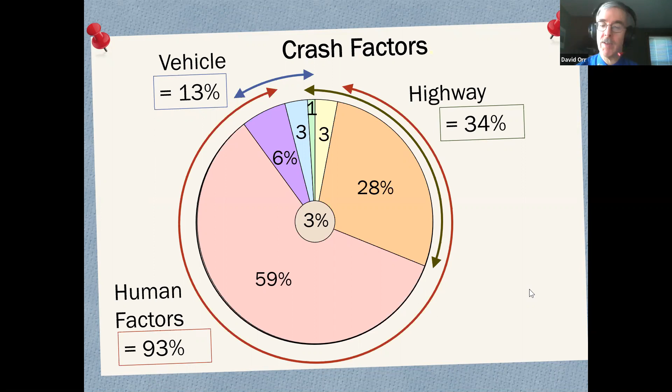Look at the vertical alignment. That starts to get economically, could get a little bit more expensive. That's a good idea, though. Something to at least think about. Again, the idea is to think about what you can do short-term and long-term.

And again, we can spend a whole hour on it, but one of the things that as I go around the state and I see that I really wish people would put a lot more effort on is look at the edges of your roadway.

Now we're going to see if our video shows today. I've got several videos of being brave today and see if the internet's going to be happy with me.

So one thing I'd like you to think about, long before we think about rail, is think about repairing the edges, your drop-offs, especially on the inside of corners, maybe even widen the pavement out because we know vehicles tend to track, or using the safety edge. We've talked about it in a couple of the webinars we've had this spring. So I really wish we could spend a lot of time on that, but today we're going to be talking about rail.

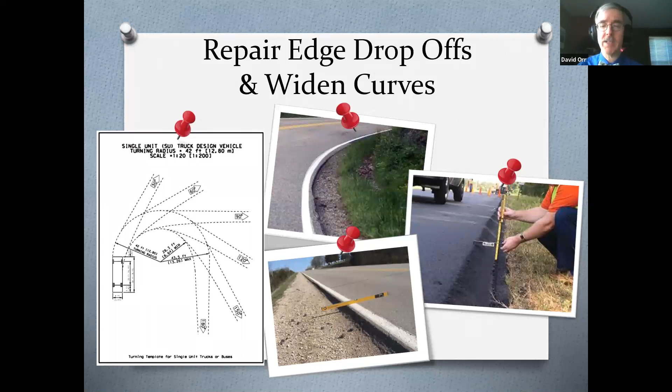But looking back at that particular photograph, without having to do major realignment, with a lot of extra effort, people mentioned the delineators, actually chevrons possibly needed, proper signage to tell the driver what to really do, and actually really important, might need to be widened here on the inside of this corner, to widen the inside of that sharp corner. It's actually in the Green Book, it's in the standards, but we don't do it as often as we probably should. But just look how the back end of vehicles, especially those with trailers, track, and try to accommodate that with your pavement.

But what we're going to do now, though, is we're actually going to talk about the roadside. So what happens when a vehicle does leave the roadway, and how do we keep them safer? Okay, so I'm going to talk about some of the most common roadway hazards, but again, in the Q&A pod, if you would please, put in an example of a roadside hazard that you think is commonly struck by vehicles when they leave the roadway. Put in some answers for me.

A tree, yeah, tree's a good one. Utility poles, signs, blind spots, giant mailbox structures. Yeah, I like that one. Guide rail. Yeah, guide rail in of itself is a hazard, and we're going to be talking about that to some extent, okay? Okay, so those are some good answers. Let's go a few of them, talk about a few of them, and talk about their relative hazards that we come up with a little bit.

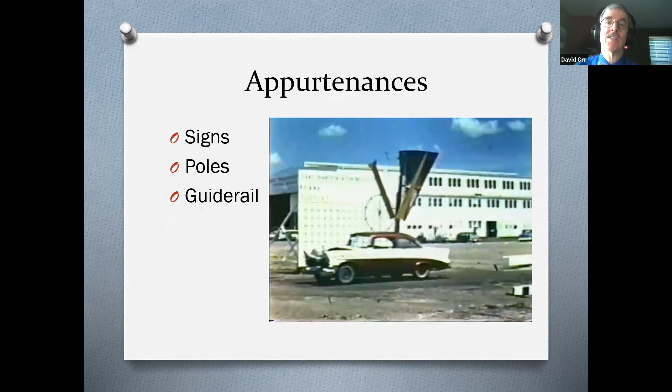We want to have breakaway systems for our signs, possibly even for our poles. And we want to put rail up in such a way that it actually doesn't make things less safe, if at all possible. Okay, so keep that in mind as we go forward. Signs certainly are an issue, okay? And if the signpost isn't breakaway or sticks out of the ground too far, it's going to be an issue. So we need to make sure we don't do that.

Utility poles are certainly an issue. We can't get rid of all the utility poles. They're there for a reason, but we want to think about where we put them. Make sure we put them in a place that is at least less likely to be struck, or if they are struck, maybe they're not struck at such a high speed. And yes, rail is a hazard, especially rail that's got improper ends or isn't anchored properly, can certainly be a major issue. So think about that as we're thinking about whether we're going to put rail up or not.

And when it comes to fixed object crashes, I'm going to give you a list, okay? Trees and shrubs, signs and poles, barriers, or other fixed. In the Q&A, what do you think is the most commonly struck? Trees? Trees. Yeah, I did say earlier, somebody was listening. Turns out almost half of all the single vehicle fatal crashes when you leave the roadway are caused by somebody hitting a piece of vegetation, a tree or a large shrub, okay?

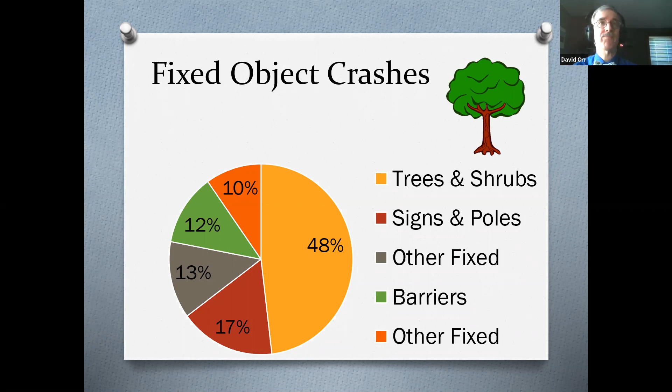But signs and poles, they pop up pretty high, 17% still, so that's pretty important. Other fixed objects, the barriers are a danger, about 12% of the fatals. That's when they hit barrier. And then there's other things like slopes that lead to fixed object crashes that are counted that way, okay? And for those who are wondering, it's just as dangerous in an urban setting hitting a tree. The fatals aren't that much less. People go, well, it's all rural, high speed. Well, about a third of all fatal crashes with trees actually occur in urban areas because trees are pretty unforgiving, okay? So one of the things we want to think about when it comes to trees is having good clear zone and basic recovery width.

Now, I don't like in a slide deck to put too much in the way of text because I know what's going to happen. You're all going to read it, okay? But this is one that's important enough. I want to put it in. This comes from the AASHTO Roadside Design Guide. And if you didn't get the handout, you can download that handout later on. The Roadside Design Guide defines the clear zone as the unobstructed traversable area provided beyond the edge of the through traveled way for the recovery of errant vehicles.

Okay, so that essentially means everything past the shoulder. Some people define it at the edge of the shoulder. In my mind, think about how wide you want to be able to run off that road and not hit something or drop off so steeply that you can't traverse it. Okay, now, does anybody know what they'd like to see for a clear zone on their particular stretch of highway? What would you like to have? 15 feet? I see a 15 feet.

Okay. Well, 15 feet's not uncommon, but has anybody ever heard of a 30-foot clear zone? People talk about a 30-foot clear zone. It's commonly talked about in the literature, and people go, oh yeah, we got to have that. Somebody already knows the answer. They've been reading ahead. Varies depending on traffic count and speed.

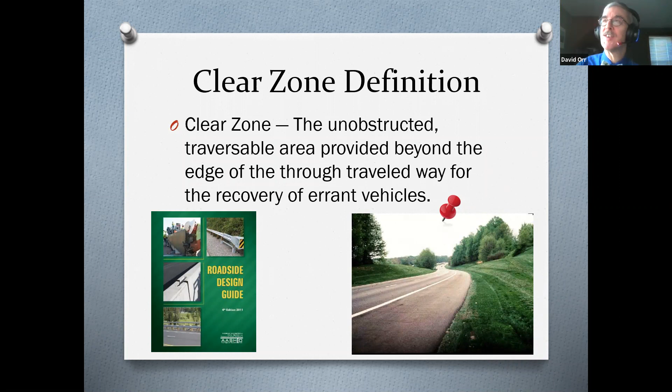clear zone? That sounds really good, except realize, A, people leaving there didn't have to worry about hitting a tree. It's a wide open area. It's a testing track, and they might be driving a little faster than even the people who probably are driving too fast on most of our roads. They're purposely trying to test things. So 30 feet was chosen, but it might have been a little bit too much.

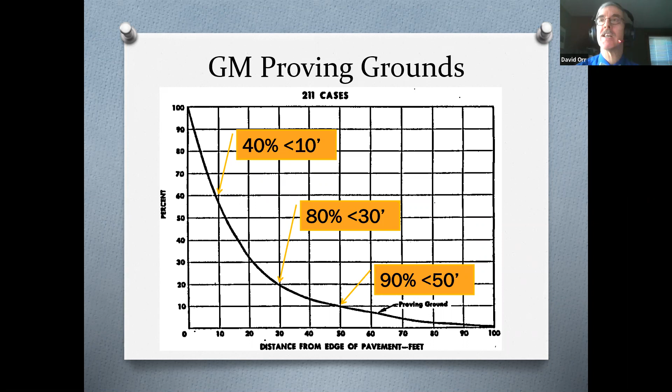Now, on an interstate, can't say that that's necessarily a bad number. Probably is a good number. But we don't necessarily need to have that much clear zone on all of our roadways. And it really does depend on speed, type of roadway, a whole bunch of conditions.

So if you look at all the standards and you start reading through the literature, for urban low-speed roads like in a village, how much distance do you think you need for a clear zone in a village or a small residential part of a city? Do you need 30 feet? Could you even get 30 feet? I mean, I'd have to bulldoze my house. I'm not 30 feet from the road. So what would you like to see for a clear zone in an urban area? 3 feet? Yeah, that's possible. Yeah.

Consistency does actually help. In a rural area where there's higher speed for low volume roads, if you look at the standards again, under 400 vehicles a day, 6 feet is a good typical number that you'll see people use. But that's on straightaways, okay? And obviously, again, more is better. Most local roads, 7 to 10 feet is probably fine. And you want to be consistent about that more than anything else.

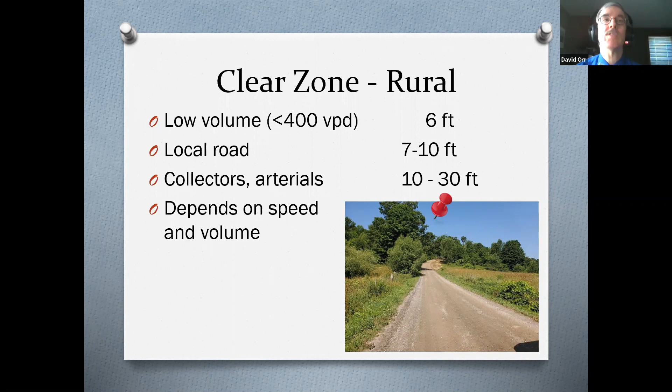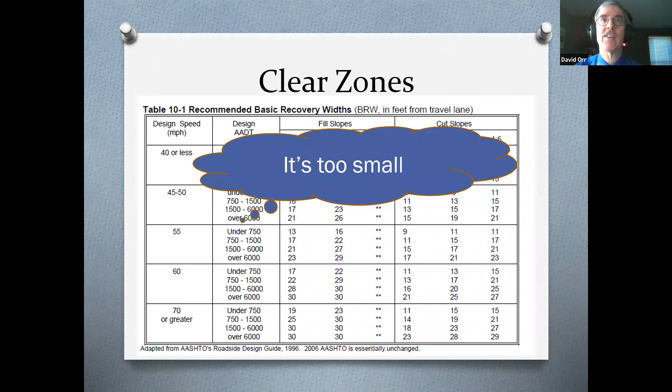And this is the chart from the handout, and I know what you're thinking right now. You're all thinking the same thing. You're going, Dave, it's too small. I can't read it. It's okay. You don't need to read it. You can download the HDM. It's table 10-1 if you need to look it up. We're not going to get into specific numbers too much, but there are a couple that I do want to talk about a little bit.

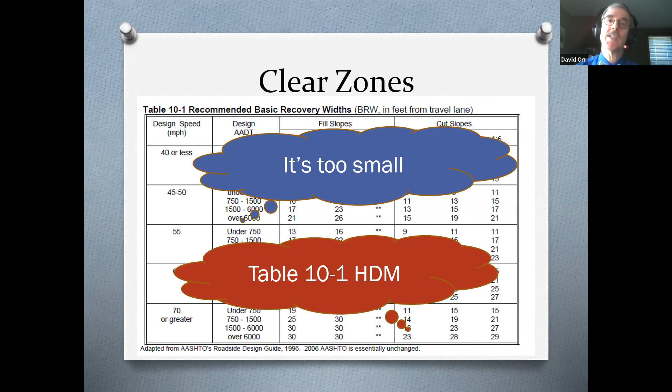And it does matter in terms of your clear zone. It matters your slope, it matters your speed, and it matters the traffic volume and even the type of roadway to some extent. So if you pull out from that table and you look at a high speed, our typical state speed limit of 55 miles an hour, and you look at traffic volumes under 750 vehicles a day, if it's a fairly flat slope, 16 feet is what the state recommends on the collectors and arterial system, okay? They don't recommend even worrying about clear zone slope, though, if it's steeper than 1-on-3 or even 1-on-3. They want you to do something else, like possibly put in some rail.

And on an arterial, that's probably a good thing, but most of us can't get a 1-on-3. But again, it comes down to slope and speed and things like that. Now, in your existing system, I know very few people who are going to be able to get a 22-foot clear zone. It's just not going to happen.

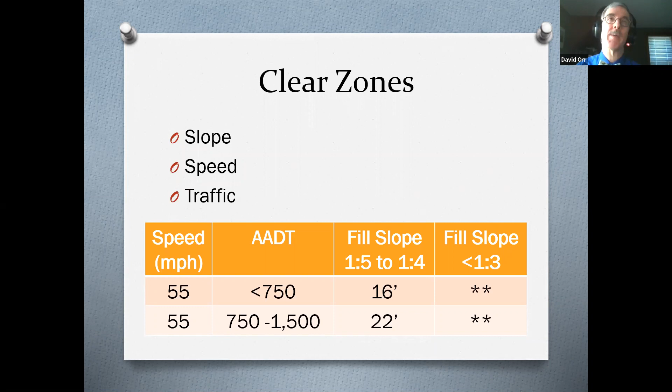So really what you want to think about is for your existing road system, maintain the existing width. Try to improve at problem locations where you know there have been accidents or crashes or concerns. And whenever you do construction, when you do major upgrades, try to improve that clear zone, again, trying to be consistent, okay?

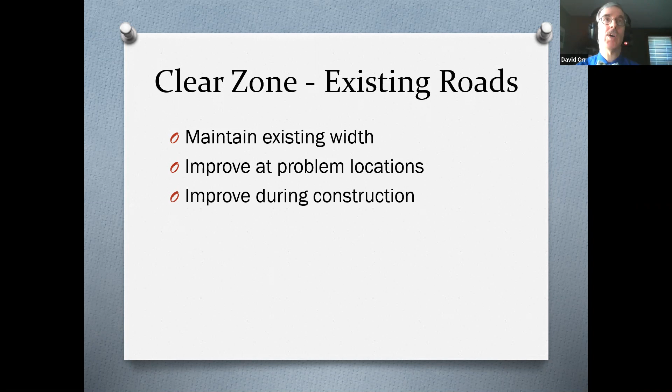One of the worst things we can possibly do is when we cut down trees, we leave the stumps. You really want to cut them flush or remove the stump completely. Grinding it flush is actually fine, but don't leave a stump like that. That's actually one of the most dangerous things you could possibly do, because now you don't even notice it until it's too late.

So first question for the day that we'll have, I'm not doing a poll on this, so it's okay. Just answer the question, what is the proper clear zone on a highway? You should be able to answer that now. What is the proper clear zone on a highway? 6 feet, possibly on the local road, yeah? Depends on the situation, yeah? It depends. It depends on your speed, depends on your slope, depends on your traffic. And you probably should think about setting up policy for this, okay?

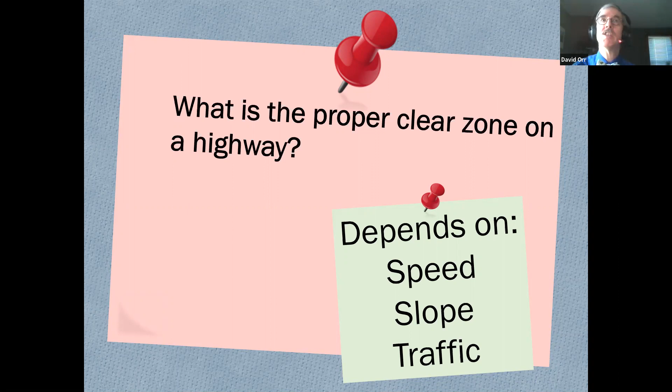Now, one thing, please think about this. Clear zones, we want to be consistent, but think about increasing your clear zone on your curves, okay? The sharper the curve, the more you want to increase that clear zone, because the more chances someone's going to go off and hit something, okay?

So extend it out. There are places on the interstate system where they've got 30-foot of clear zone, and yet it's very deadly because it's on the outside of a corner and people drive straight into the fixed object. So think about making it wider. It also improves, by the way, sunlight on the curve. There's a lot of good reasons to do that, but think about improving, especially on sharp curves.

We want to remove any hazards. We want to make them traversable. We want to relocate them away from the spot where they could get hit. If we have to leave them in the clear zone, we make them crashworthy. Then and only then do we shield them with some kind of rail system. And finally, we delineate. And there are actually times where you would flip the order and you would delineate first. And we'll talk about that a little bit, okay?

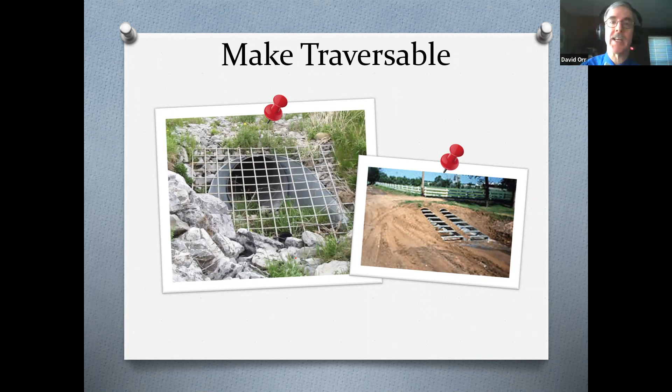And somebody did ask, and I'll go back real quickly. They asked about clogging of the grates. Yeah, these grates that you'll see, these special ends, they're not designed to stop clogging. So you're going to be able to yank them out when an event occurs. Their job is to reduce the need to put rail up, okay?

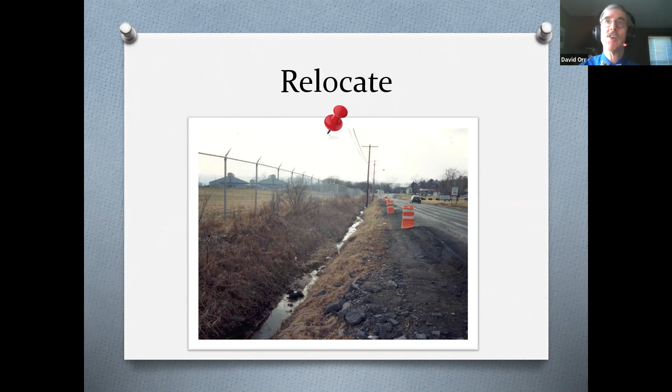One thing we can do, we don't do it probably enough, is to relocate the hazard, move it out of the danger zone, get it further and further away from the roadway. If it's too close, it's more likely to be struck. There's actually data out there, if you're interested. This is actually from the National Cooperative Highway Research Program, or NCHRP. It's 440, it's on the web. It's also in NCHRP 500. But it shows the crash reduction by relocating the hazard.

So if you could move the trees back just 3 feet, you drop the crash rate by about 22%. If you could move it 10 feet, you can cut it by 2/3, which is why it's so valuable to look at getting the trees further back if at all possible. Even removing your mailboxes and your signs can reduce the crashes because they're less likely to get struck. And rail, interestingly enough, you put the rail where it belongs. Put it up when you need it, but put it up properly. You can actually reduce the crash rate. Okay, so moving things back can make a huge difference.

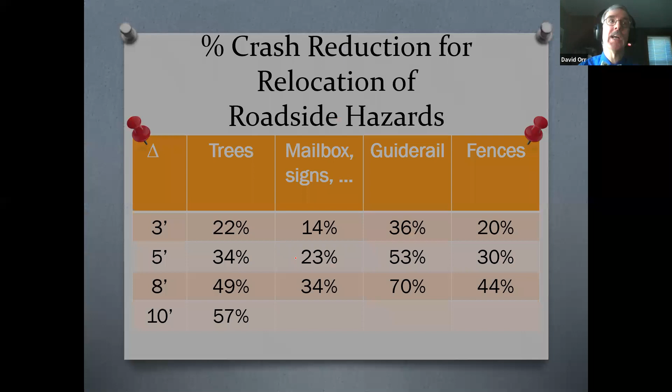And while I'm waiting for an answer there, someone asked, do signs saying no shoulder work? They work in the short term. Signs like no shoulder, you might see them for about 5 or 10 passes, but eventually they stop working. They should only be temporary. A no shoulder sign is really just a warning that something has changed. I wouldn't make that permanent because people will stop seeing it after a while.

Yeah. Yep, everybody's getting it. The utility pole in this case is right in the bottom line of the ditch.

You don't want to put something in what is known as the traversable way of the ditch, because that's where the vehicle, if it goes off this road, is going to wind up going. And if it's got any speed, it's going to stay in that ditch line. And by putting the utility pole in the ditch line, you've actually made it almost more hazardous than if it were up closer to the roadway.

So when you think about where utility poles are, try to avoid any place where a vehicle could be going down that ditch because it goes off the roadway for whatever reason, okay? So in this case, I'd actually want it further over to the Kritz Farm sign there.

You can make things crash worthy. Mailboxes, you know, we put them in our road system, but we can make them more crash worthy. They're not the big brick things that are out there, okay? And there are designs that are designed to flop over the top of the vehicle, get crushed straight down, but you can make them crash worthy. And that's not just the case of our mailboxes. Our signs as well, we can do the same thing, okay?

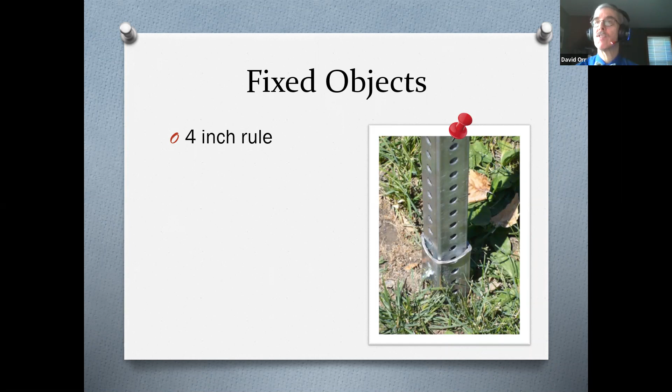But do me a favor, if you're going to put in signs, especially in the clear zone, make sure they either break away or the parts that aren't breakaway are down below the 4 inches. Okay, like a number 3 post, that's considered crash worthy. But anything heavier than that, you need to have a ground post and a proper connector. In this particular case, that connector connecting those 2 channels cost 25 cents. It's pretty cheap insurance.

So now we're going to talk about shielding. Well, actually, we're going to talk about shielding a little bit more in a minute. But notice I'm all the way down the list to almost the end, and now I'm talking about shielding. Shielding is one of the last things we do because, as we talked earlier, about 12% of fatal crashes involve hitting rail. So we can put shielding up, put up our rail, but we want to do it properly, okay? And then lastly, we delineate.

In fact, if you're not sure in the short term, delineate. Put some delineation up, watch it for a while until you can come back in and do something else. Relocate, put up your rail. I always like to start with some kind of delineation. It's not a bad idea. In fact, there was actually some pretty good evidence out there that on really low volume roads, under 400 vehicles a day, it's actually probably more economical and actually less likely to actually cause some severe crashes to sometimes delineate first and put up shielding or rail last.

Now, it depends what you're trying to protect. In this particular case, this is a pretty steep slope. So maybe this is a case whereby you could think about putting up rail. But on the other hand, I happen to know in this particular case, the traffic volume is under 20 vehicles a day. So as a minimum, let's put up some delineation. Okay, delineate the edge of this. Just some simple delineators. You can lollipop them or not, that's up to you. Okay,

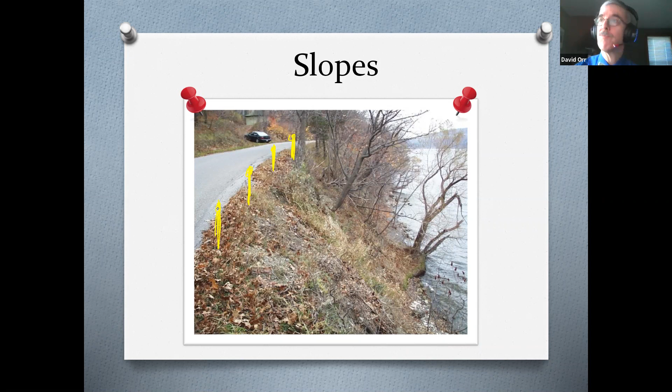so start with that. So in the Q&A pod, let's see how we do. What are the steps for dealing with roadside hazards? There's 6 of them. See if anybody can get all 6 of them here.

I know I'm making you type early in the morning without too much coffee.

Identify your problem. That's probably a good point. That's the first thing, is to identify what are your issues. Yeah, that's actually a pretty good point. Remove, make traversable, relocate, make crashworthy, shield, and delineate. Very good. And by the way, it's in the handout. You don't have to remember it, but I just want you to think about the fact that rail is valuable, but it's really towards the end after you've looked at everything else.

But when we talk about guide rail, we want to make sure we have the right type of guide rail. There's lots of different types. We have to worry about the deflection of the rail system. That's actually very important. There's something called the point of need. We'll talk a little bit about that. The runout length, especially if you've got bodies of water or things you don't want someone driving into behind the rail system. And then the end sections themselves.

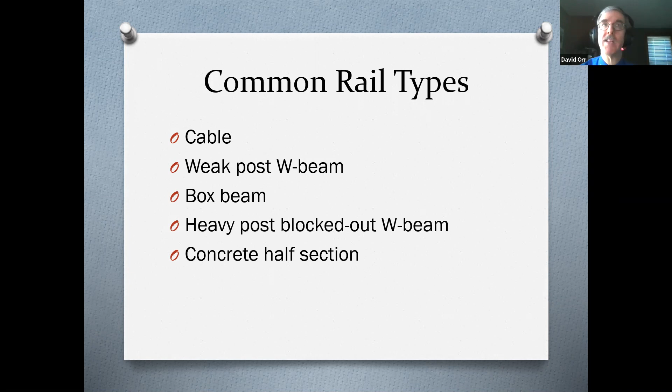I like cable rail. Cable rail's aesthetically pretty pleasing. It doesn't interfere much with your viewscape, but you've got to maintain it. There's a turnbuckle system. It's got to have the proper tension. You need all three cables to have about the same amount of tension in them, or they're not really going to do the job as well as you'd like. But cable's a common system and can actually be used against slopes if it's got the right connections to the post.

You can use weak W-beams. I like that. Again, it's a fairly light system, but it's got to have enough length to build up that tension to act like that big rubber band. Otherwise, it's not really doing the job we want it to do. And it's got to have enough deflection. And we'll come back to that in a little bit.

There's box beam. Again, we use a lot of box beam here in New York State. Box beam is nice. It actually transitions into bridge rail pretty easily. People like it. Relatively easy to maintain. But again, it's a little stiffer than the W rail system. You can block things out with plastic or wooden blocks and heavy post beams.

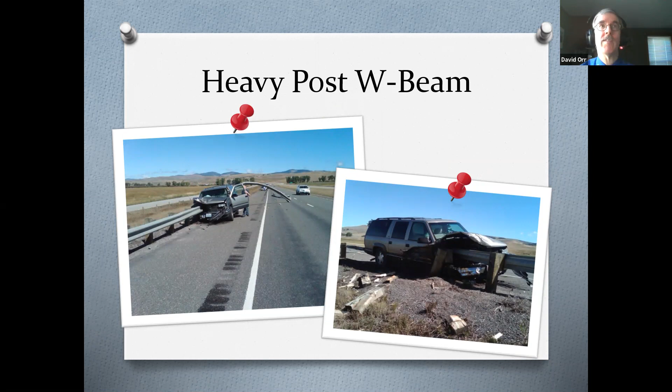Now, this particular picture shows the aftermath of someone actually going through the end of the rail system. You've got to have good end sections, whatever rail system you've got. Now, the next thing I'm going to show you is a video of a newer system called MGS. It's a Midwest Guardrail System tested to the most current AASHTO standards. We can get you the details for this, but I just want you to see what happens when a truck hits.

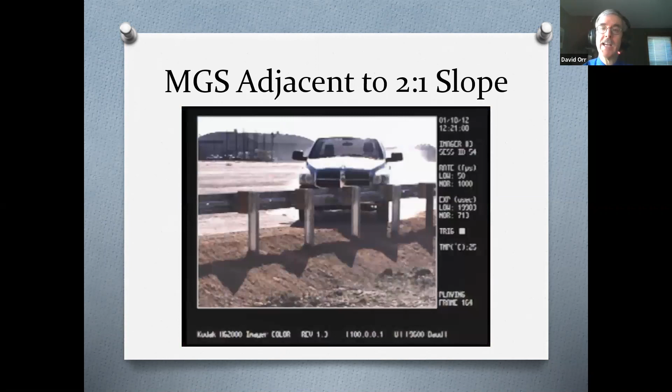And you can see it actually worked pretty darn well. The blockout system, it hits it pretty hard. Watch it coming in slowly. The whole point of the blockouts is to give it a little bit of space so it doesn't snag on the post. And it does a pretty good job.

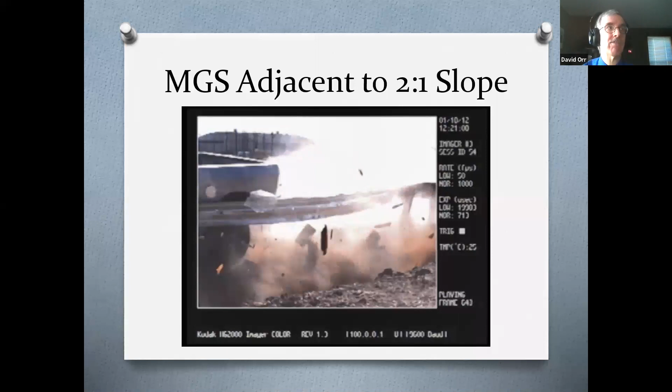It does snag right there. You can see a little bit of snagging. But for the most part, that vehicle is almost in midair and is being pulled back by that rubber band effect. And it hit it at a pretty sharp angle. But again, the rail did its job.

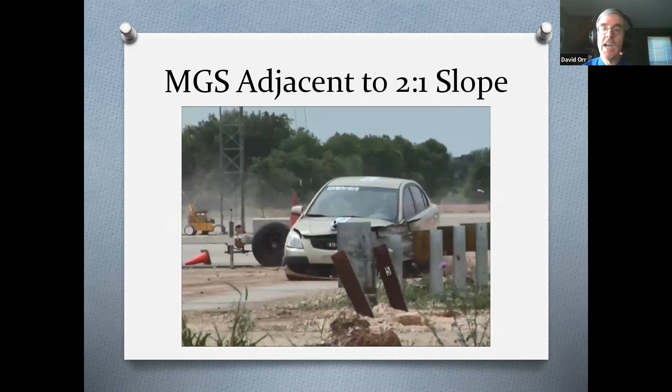And watch what happens when a smaller car hits it. Yeah, a little more damage to the car, but the driver could walk away from that. And that's really the goal in this particular case. Watch high speed. The damage was because it did a little bit of snagging. But again, it did an amazing job of protecting.

The key is use the lightest rail system you can possibly use. You can use it up against slopes, but if you do that, make sure you've got good soil support, because that post system has to have that support to hold it in the right elevation, but also to help continue that tension along the system. Otherwise, it doesn't deflect properly.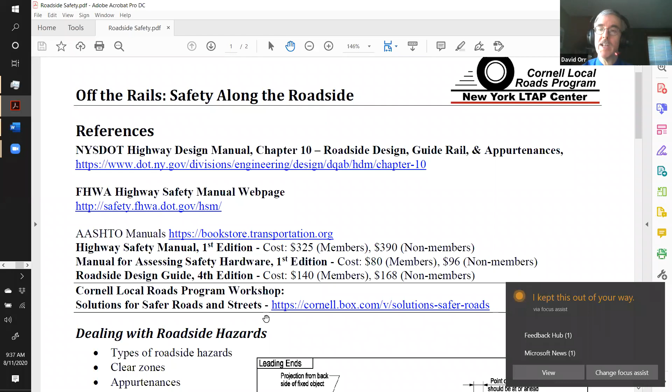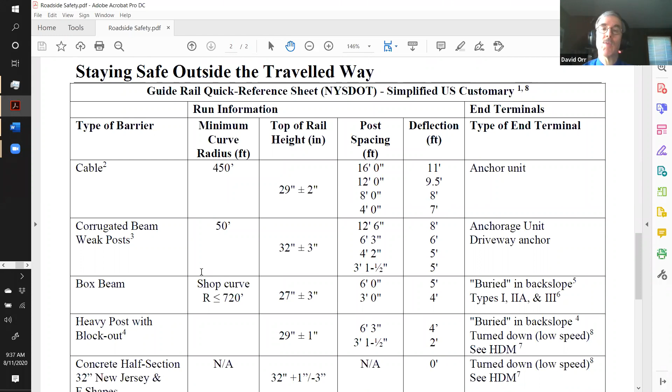So I'm going to scroll down here. And in the handout, you'll actually see a table. This is pulled from New York State's quick reference sheet. It shows for the different types of barrier what the deflections are. So you can see, depending on how stiff it is, how much deflection it's going to need behind the system. Now, why is that important?

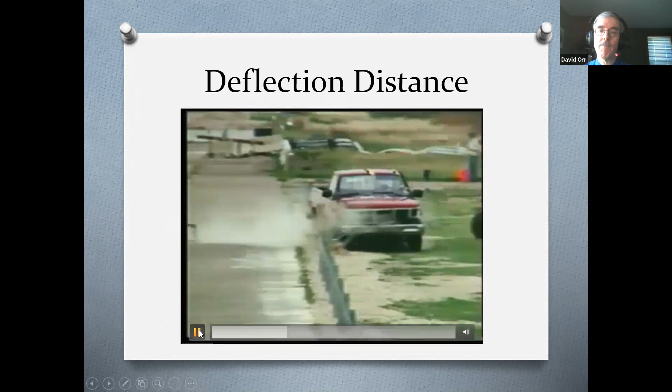Well, let's go back over here to our slide deck and watch again the same video we saw before. Watch how much distance that vehicle goes down the roadway. I'm going to do this one more time. I'm going to stop it. That truck has deflected all the way out, more than the width of that particular truck. If there is an object within that deflection distance and it hits the rail, it's actually going to be directed into that particular object.

So in this particular case, this W rail that's up, if someone actually hits that rail system upstream of this tree, they're actually going to be directed into the tree. They have no choice. So you never want anything inside that deflection distance that's a fixed object. So you need to remove any trees, you need to remove heavy shrubs. Don't let utility poles be inside that deflection distance.

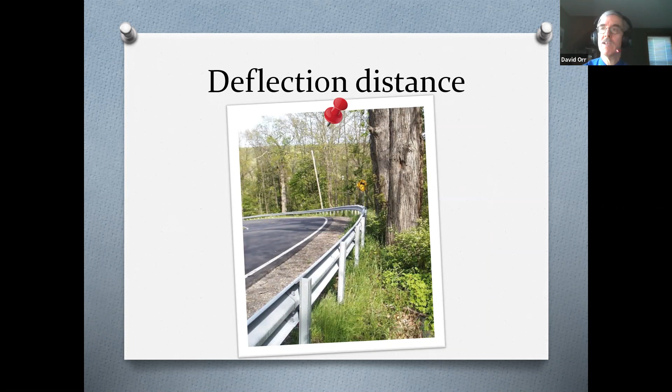So the question then comes, which rail systems have a deflection of less than 5 feet? So I'm going to go back over to the chart and let's go look at the sheet. Which ones have a deflection of less than 5 feet? You can put it in the Q&A pod while I find the ones on here. Let me see if I can get my pen to work here. Here we go, comments.

And I'm going to highlight less than 5 feet. No cable systems have it. 5 or equal, the corrugated with a tight post spacing here. Oh, you're not working for me right now. Box beam, 3-foot spacing. Box, heavy with a blockout. Yep. Jersey barrier. There are different systems out there. Again, you can look them up in the table.

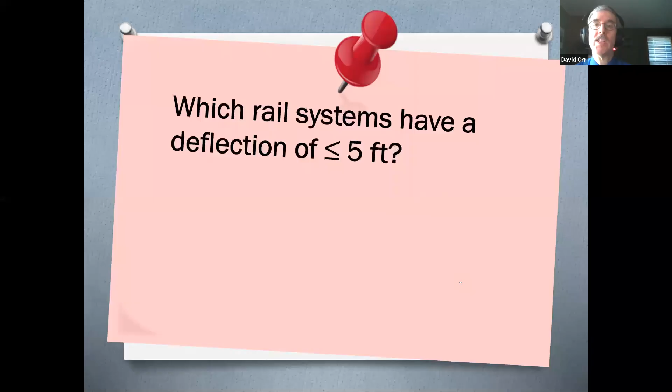So if we looked at that, systems with less than 5 feet, there's really weak post, very tight spacing. Box beam, heavy post with blockouts, and then concrete. You're getting some pretty hefty systems when you start doing that, and you've got to look at your post spacing. That does make a big difference because, for instance, if we look at the corrugated system with weak post, you put a standard 12-foot 6-inch spacing, you're going to have way too much deflection. Okay.

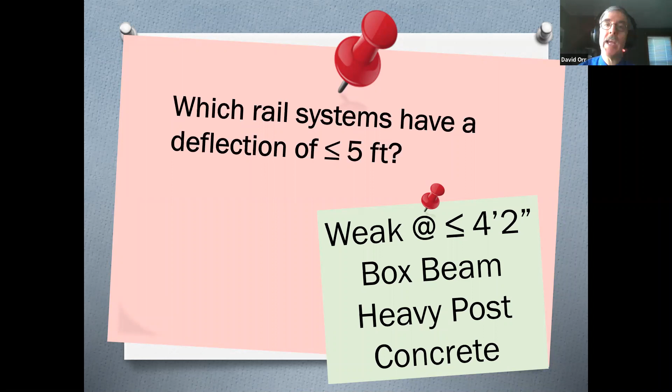Now, in the charts, in the books, you're going to come across some tables. One of them is called a deflection reduction factor chart, which allows you to reduce the amount of needed deflection. Okay. If we look at, say, for instance, 55 miles an hour, and your lateral offset essentially is how much distance can that vehicle be away from the face of the rail before it swings over and hits it, i.e., how much distance from the other lane over to the rail system.

And some people could argue, well, on a fairly narrow town or county road, I could get down in here, let me get a pen color we can read here. There we go. I could get down to here and reduce the deflection, you know, down to 80% or something like that if it's a fairly narrow roadway. 80% of 5 feet is still only 4. Most of the time on high-speed roadways, I wouldn't even bother. It's not worth the risk.

Only when you start getting into urban areas where it's really low speed do I think you can gain some from taking advantage of these deflection reduction factors. It's much easier. Just keep things out of the space behind it. Because again, that's designed for a car. What happens if a big truck hits it? It's going to deflect more. So give yourself room for the deflection.

Okay. And a note here in the pod that says I've seen some awful motorcycle accidents on cable systems. Are all systems equally bad for motorcycles? Actually, a properly set up cable system where all 3 strands are about the same tension isn't actually that bad on the motorcycle. The problem is if there's any slight variations, it can do some real damage. And by the way, it can flip a car. So the idea being, be very careful with maintenance with any system.

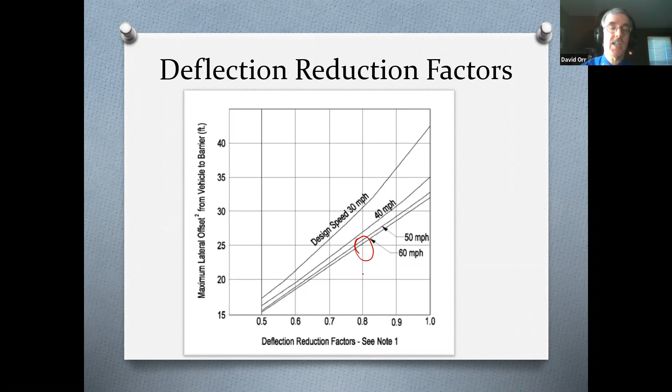And what is the maximum lateral offset? I'll tell you what, I'm going to go over to my point of need picture. We'll talk about point of need here. That essentially, if you imagine you've got a roadway here and I've got a vehicle in the far lane, way over here, and he's going the other direction, is the distance he would traverse from here all the way over to that point. So if you had a roadway that was 30 feet wide, including your shoulders, the lateral offset would be in the 24 foot range, depending on the width of the vehicle. That's where that comes from.

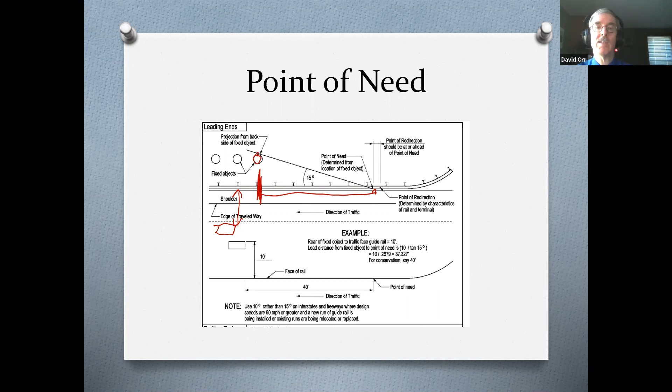But let's talk about that point of need. Most rail systems I see are too short, okay? And so they just don't have enough distance. If you've got a fixed object behind your rail system, you can't start your rail right here where the first fixed object is. You have to come back so that if a vehicle hits the rail system or doesn't hit the rail system because it hasn't started yet, it doesn't wind up hitting the fixed object. See, it's called the point of need. Now, again, don't try to read this. It's too small, okay? It's in your handout. You can look at it later on.

But an easier way to think about this is there's a formula, okay? It's the distance that you need to have from the front of the rail to the back of the object, R, times the cotangent of 15 degrees. Does anybody know what the cotangent of 15 degrees is? It's a hard number to remember. Just remember 4 times R. So essentially 4 times the distance from the front of the rail to the back of the object.

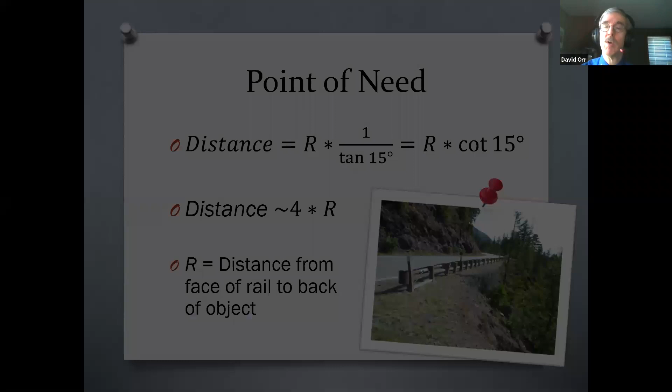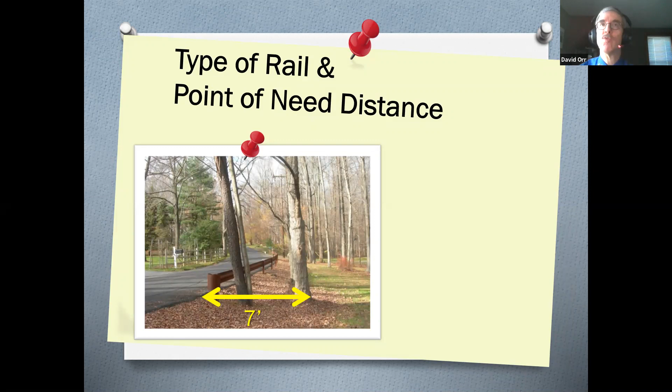So if we go back to our picture we had of our W rail that we know was too short, and we measure from the front of the rail system all the way to the back of the object, and if it's 7 feet, how much distance do I need to be down the road when I start my rail system? Okay, 28 feet, exactly. 4 times 7. Now, if you do the actual math, it turns out to be 26.2.

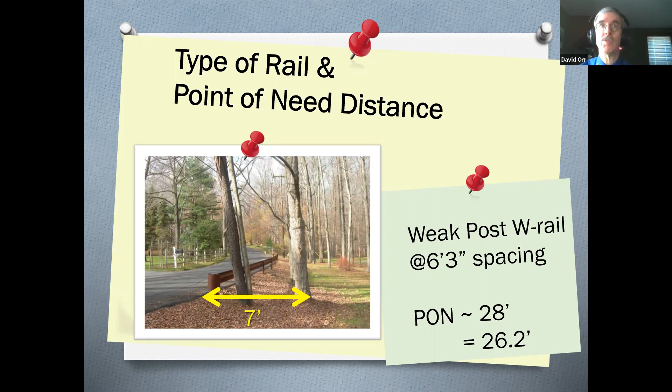28, okay? 28 feet to the beginning of the full rail system, but then you're going to need to add an end section on the end of that. That's to the beginning of the full rail system and into your end section. We'll talk about end sections here in a few minutes. The other item is something called the run out length, okay? Now, in this particular case, you're not worried about someone getting in and hitting a fixed object.

You're worried about them going off the edge of the slope. If it's a slope or a water body, you actually want the rail to come back further, because what you're really worried about is somebody sneaking in behind the rail, driving down along beside it, and hitting the body of water. Now, obviously, if there's a steep slope or a lot of trees, they're not going to be able to get there. But if you've got a body of water and fields and flat area, it's something to be aware of, to think about. So you may come further out, and especially you see this on the interstate system.

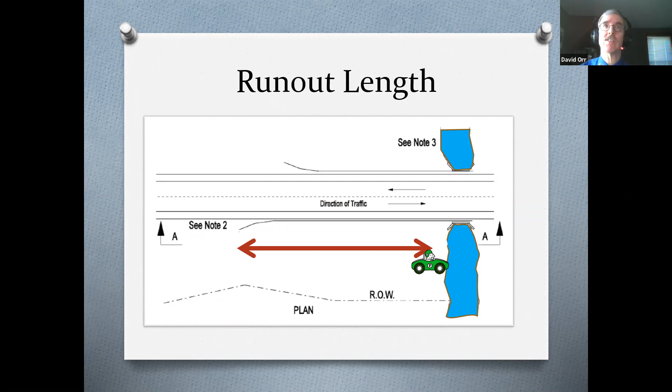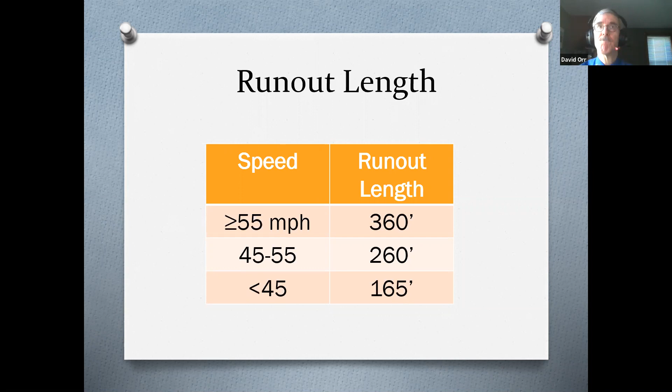And the run out length is based mostly on speed in this particular case. And so for most of our roads at 55 miles an hour, we're talking about 360 feet. So if a vehicle gets behind it, it has time to stop. Okay. Now, is it applicable everywhere? No. Okay. But it's something to think about. Now, if you can't get past it, that's something to think about, like a stream like this. You certainly don't want someone getting in behind here and driving into the stream. That would be a problem, okay?

But it's a very low volume road. Is it worth it? It's a balancing act. You're gonna have to look at that. But in this particular case, if you wanted to do a run out distance, you would have to come 165 feet from the edge of the stream. So that might define the beginning of your rail system more than the point of need, okay? Just something to be aware of. Just keep that in mind as you're putting up your system.

But what I want to make sure we are aware of is the end section issue. I see this way too often, and that is the end sections don't really do the job they're supposed to do, okay? That picture we saw earlier of that SUV that had been split by the rail, scary. And a lot of that is because the end sections aren't doing their job. They're acting more like spears than anything else. So you really want to have good end sections. And there's 4 or 5 things we can do.

The most common that we used to use for a long time was to anchor into the back slope if at all possible. And that's actually a good technique. You bring it all the way over into the back slope. That way if the vehicle gets off, it's not hitting any rail system. The danger is if this distance here with the rail is too tall, a vehicle can actually get under that rail and submarine, and it can actually be more dangerous. So be aware of that fact. There's a maximum height. In this case, you're exceeding it by a little bit. You may actually need to put a pipe section in there so that if somebody hits it, they're actually at the proper height, okay? You can also just sweep it out of the clear zone.

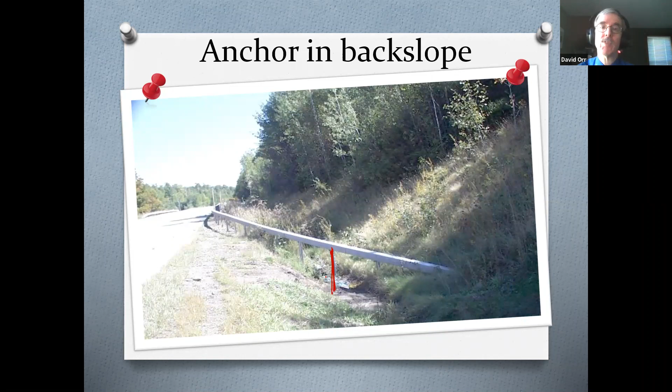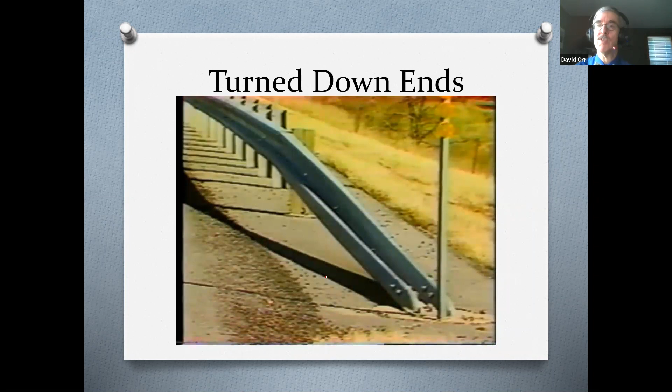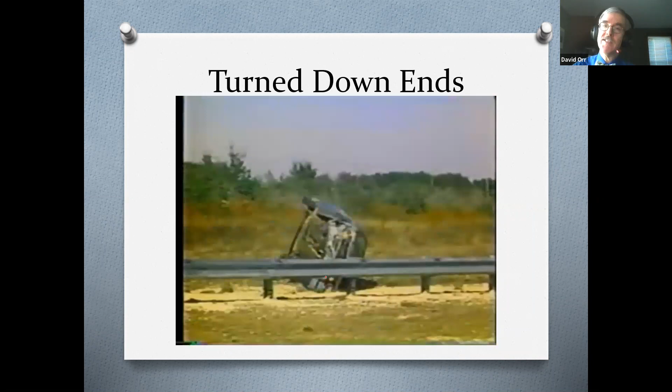And here he goes. Whoop. He vaults over the end. Okay. The end of that system can be very dangerous because it can actually launch the vehicle into the air. Okay. So it's something to be aware of. You want to be very careful with the turned-down ends.

What we use instead these days are crash-worthy terminals. There's lots of crash-worthy terminals that exist out there. They're available. Every state's got its own specs that it's approved. When you put these things in, essentially what's happening is there's a cable or a system where these last couple of posts are held together.

And the tension of the system is set up so that if you strike it just past this second post, that delineator in this case, this post here, it's got full tension. It can act just like the rubber band feature that we want, but it's also set up that if you hit it at the side, not on the end, on the side, it's supposed to fail and push out of the way, so it doesn't cause it to crash too badly. And if you hit the very end, it's designed to crumple in different ways.

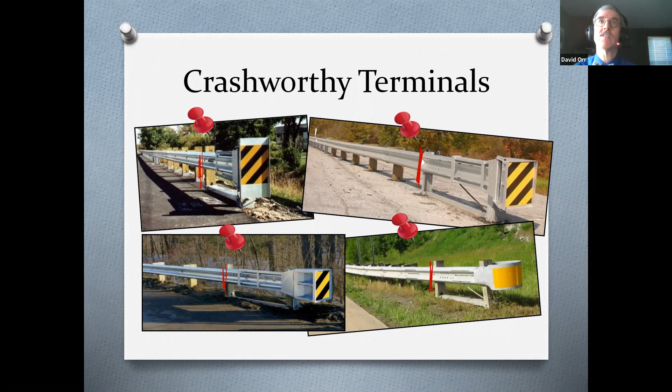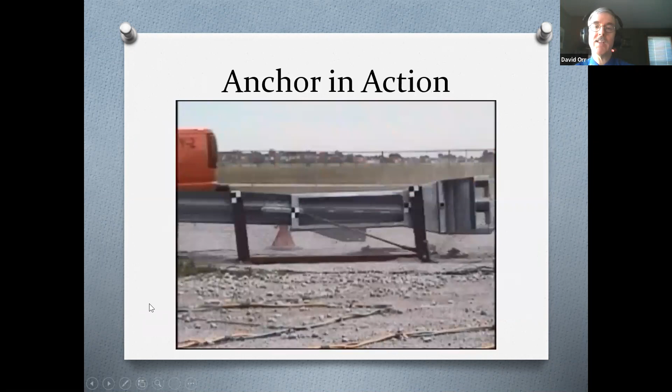Okay, so the point of need in this particular case is essentially that point where the system starts. And every system has its own system set up. But watch carefully this video here. Watch when the truck comes by, okay? And you can see how the rail system actually essentially acts as an anchor. It's an anchor in the middle of the air, and it works pretty well, okay? But make sure you install them properly, and if it has a turnbuckle system, that you go back and you do the maintenance on it to keep it in good shape, okay?

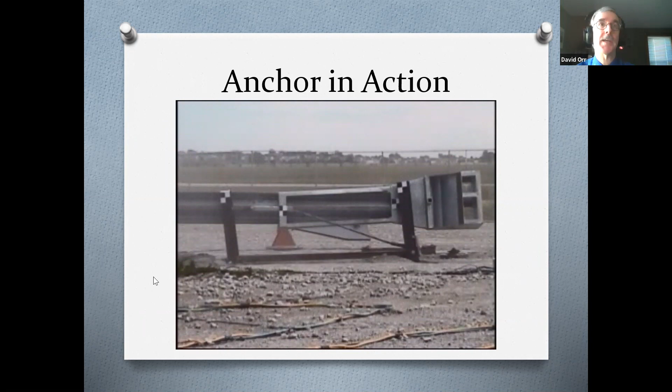And here's, of course, what happens if you haven't done your job properly of anchoring, your bolts are not put in properly, okay? You need that end anchor section. You've got to have it done properly, okay? It didn't contain the vehicle. It went right on through, okay? Not good. So put them in properly. They're really valuable, but again, choose the right end section and install it properly.

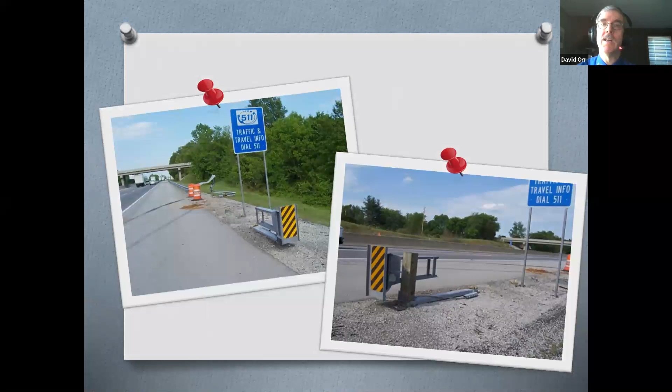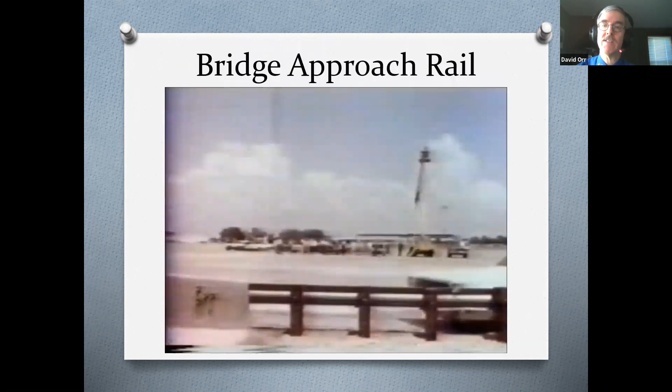The other one I see way too often is the bridge approach rail. We got to do a good job. It needs to transition from being the strength of the rail, no deflection, to lighter, which is typical. Watch the end of that car when it hits the concrete. The rail system has actually deflected it right into the end of the bridge itself. Okay, it's actually made it more dangerous than if it wasn't there in the first place. Okay.

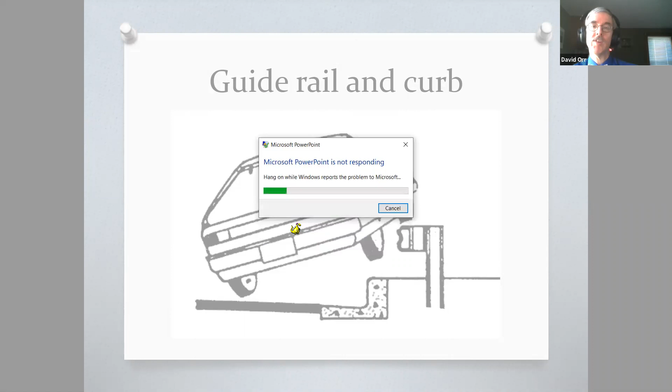And my system has decided to go freezing. Let's try waiting for it for a second here. I may have to restart. I don't know why it's decided to do that right now. We're going to close the program and restart. So you'll get to see my background screen. I don't know what my background screen is right now.

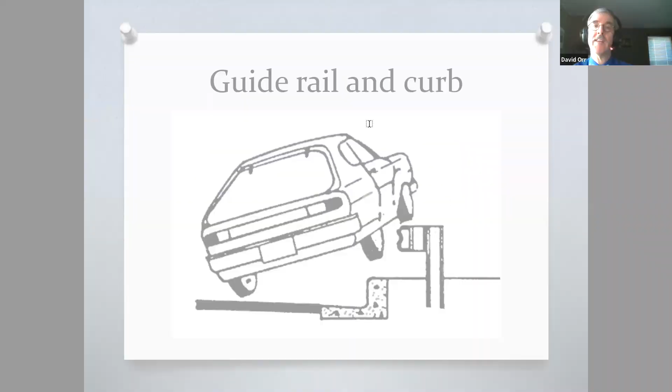But think about that when you're putting in your bridge rail systems. Do me a favor and think real carefully about that, okay? More than anything else, I really don't want you to have a situation where someone is actually worse off because they hit the rail than anything else. So keep that in mind, okay?

So I'm going to restart my PowerPoint here.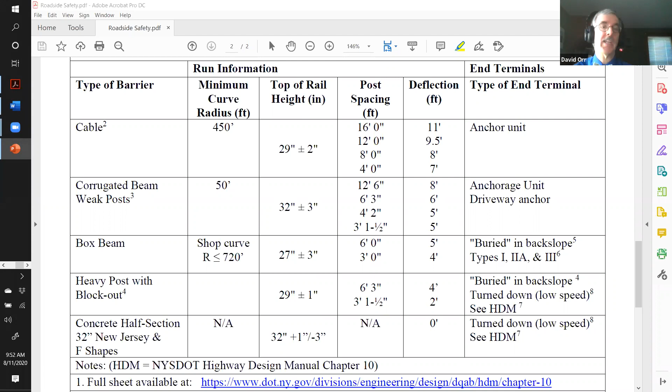And so we'll go in here. Yay, our system is working again. And we'll come down here.

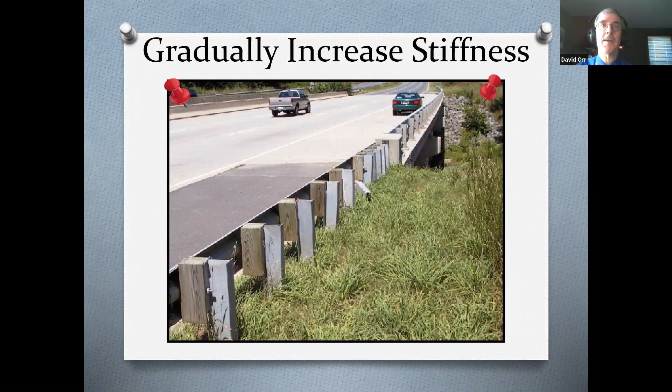So what we're going to do now is end with putting it all together. I'm going to show you some photographs, okay? I have about 6, but because my computer decided to freeze up, I'll probably show you 5. I want you to choose from the list, and I'll start a poll so you don't have to remember the choices. So you choose: remove, make traversable, relocate, make crashworthy, shield, delineate, or maybe even do nothing. So let's start with our first one, and I'll start the poll.